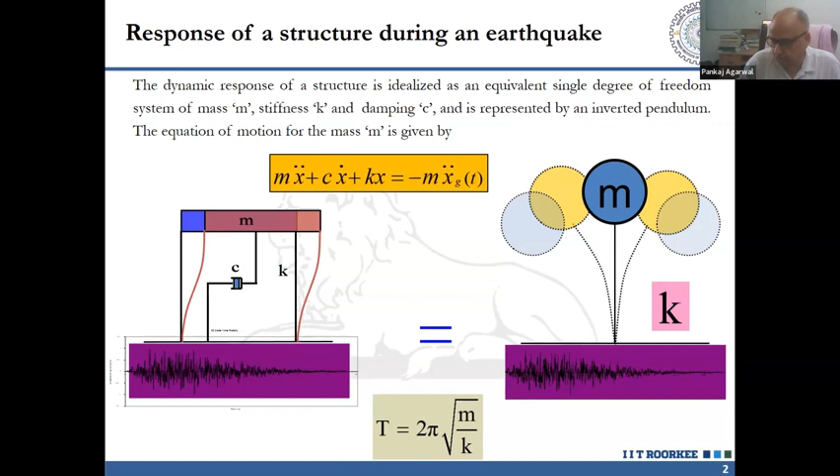So that's why any design philosophy applicable for conventional design, which you studied in your BTech program, will not work in the case of earthquakes. Since in the conventional case, the level of forces is much lesser as compared to the severe earthquake, whatever design philosophy you adopted in your UG courses will not be applicable to the seismic condition.

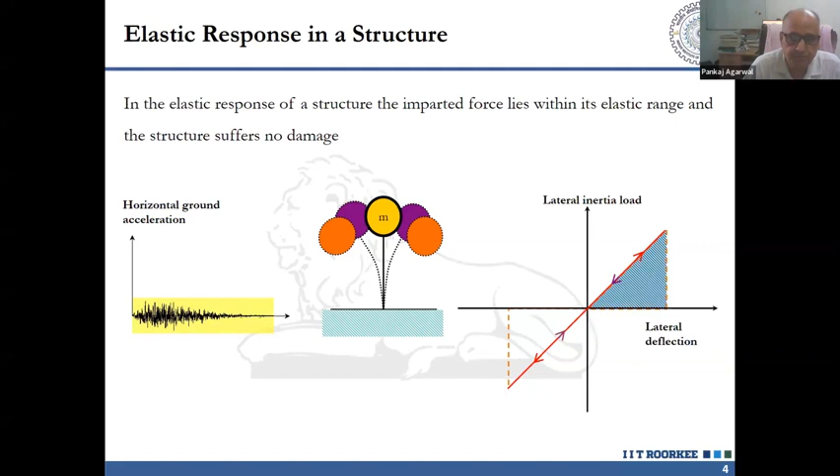So then what is the solution? The solution is that we have to basically design the structure for lower forces, so that it becomes within our permissible limit and allow some damage. That damage basically makes your structure yield and allow large deformation of the structure.

That damage, in engineering terminology, we call a plastic hinge. In a simple pendulum you can understand this phenomenon easily, since the moment is maximum at the bottom, so the plastic hinge forms where the moment is maximum, or the region susceptible to damage. That region is technically called, in earthquake engineering, the plastic hinge.

So the plastic hinge basically allows the structure to undergo large deformation. But large deformation has a definition too - the structure should not collapse. So that is the limit.

So basically there are two limits. One is where the structure starts yielding, at the level of dy, which we call yield displacement, and it deforms up to the level of du. So du is the maximum, beyond that your structure may collapse. So there is a limit between du and dy.

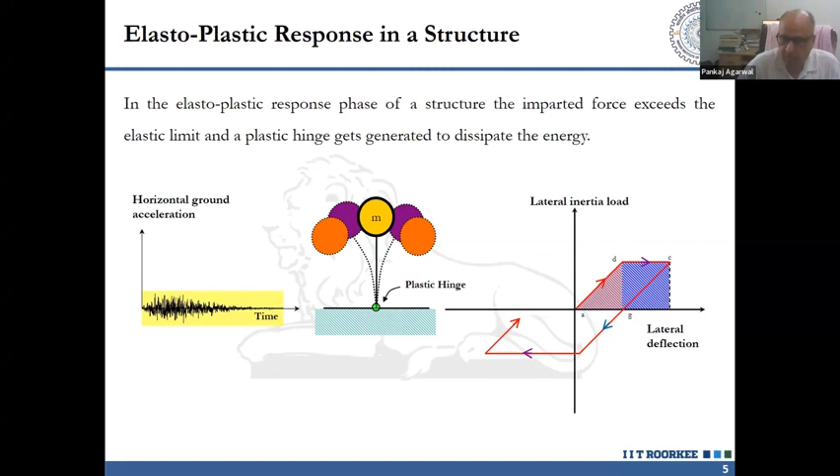And that capability of the structure is called what? It is called ductility. So the concept of ductility is basically the key approach for designing earthquake resistant structures.

So if we design the structure, we have to determine lower forces, whatever is acceptable. Once you design for the lower forces, your structure goes into the inelastic range, meaning up to a certain level of ductility. That ductility is the term mu, so delta u upon delta y we call mu.

So basically the strength and ductility are the two main attributes of earthquake resistant design of structures. Strength means the lower force, whatever is actually acting on the structure, and second is the ductility, whatever is allowed for the structure. So strength and ductility are the two main attributes we have to introduce in earthquake resistant design.

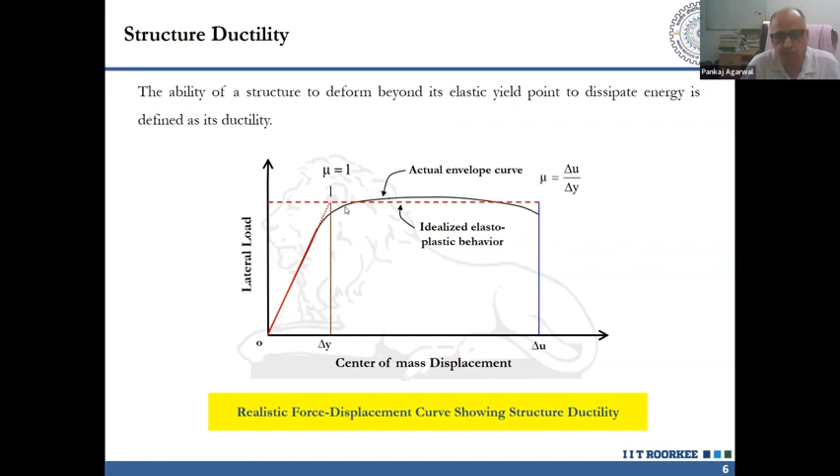So this ductility is only possible when plastic hinges form. The plastic hinges basically allow the structure to go into the inelastic range, meaning beyond the yield. That is the characteristic of the plastic hinge. So the plastic hinge should form at the region where these characteristics are fulfilled.

It should yield in flexure, and it has to gradually degrade in strength by providing confinement - flexure yielding of the reinforcement, and confinement. These are the main things that increase the capability or capacity of your plastic hinge design.

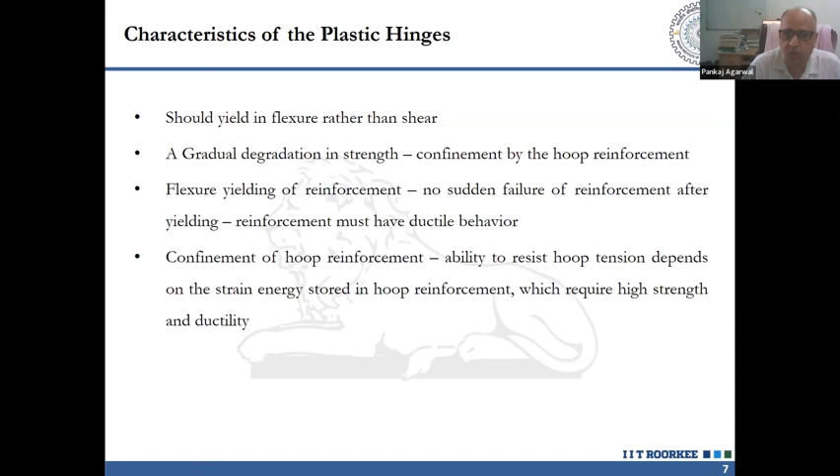So this is the phenomenon in a single degree of freedom system, and in case of multi-story buildings, the concept introduced here is the well-known concept called strong column weak beam. In case of multi-story buildings, we basically allow the plastic hinges to form in the beam rather than the column, since formation of the plastic hinge in the beam makes the structure more ductile.

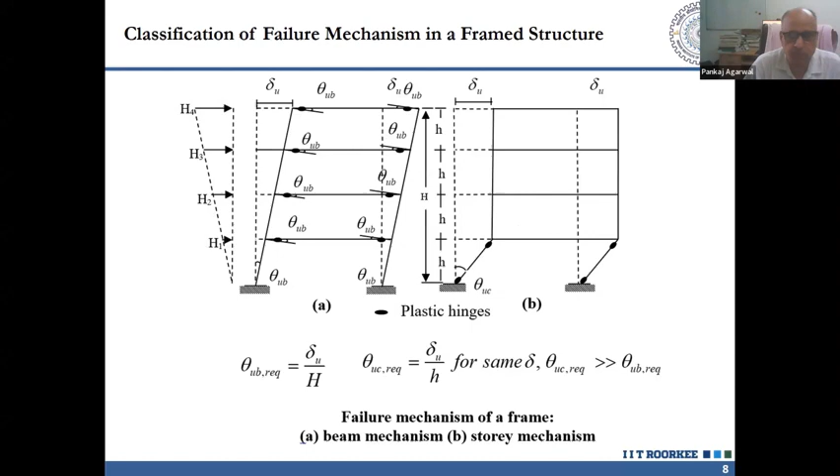Since we require more ductility, we prefer plastic hinges to form in the beam rather than in the column. If plastic hinges form at the bottom of the column, that is called a story mechanism, or a kind of rigid failure, and the deformation theta in this story mechanism is much larger than in the beam type of mechanism. That's why, by introducing the concept of strong column weak beam, we make our structure ductile. This concept requires yielding of the beam, making the column strong and the beam weak. To comply with this, our IS code 1893 and 13920 are there.

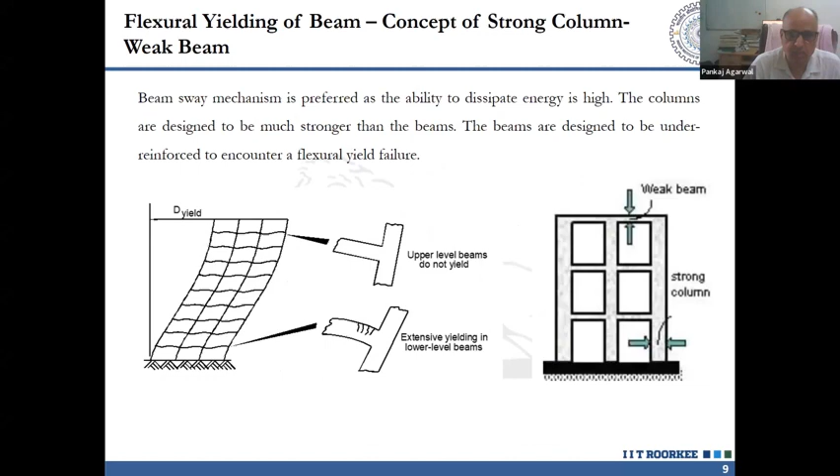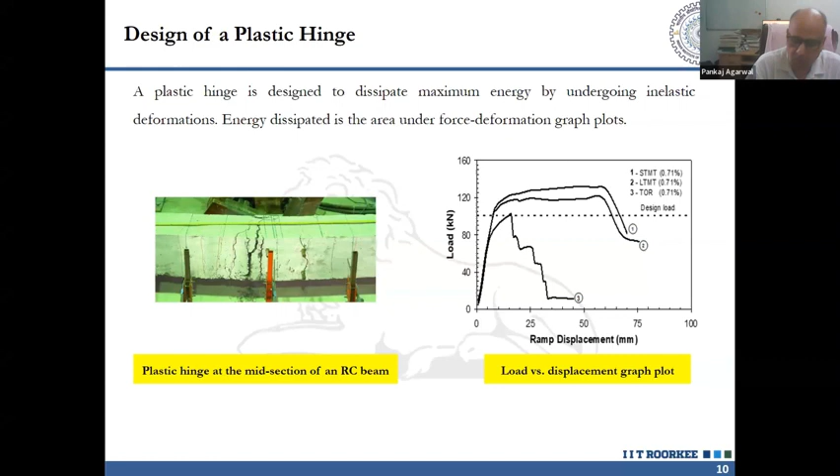This is the plastic hinge. As already shown, a plastic hinge is nothing but the damaged region where the section has yielded. We have to increase the capacity of this plastic region so that the deformation is large, which is why we provide much confinement at the plastic hinge region. The plastic hinge region is the vulnerable region of the building where energy has to be dissipated. By providing more confinement and more ductile reinforcement, you can increase the capability of the plastic hinge region. There are a number of factors responsible for increasing this capacity, and on that basis, plastic hinges are formed in the beam and column, made more ductile by introducing proper detailing of the reinforcement.

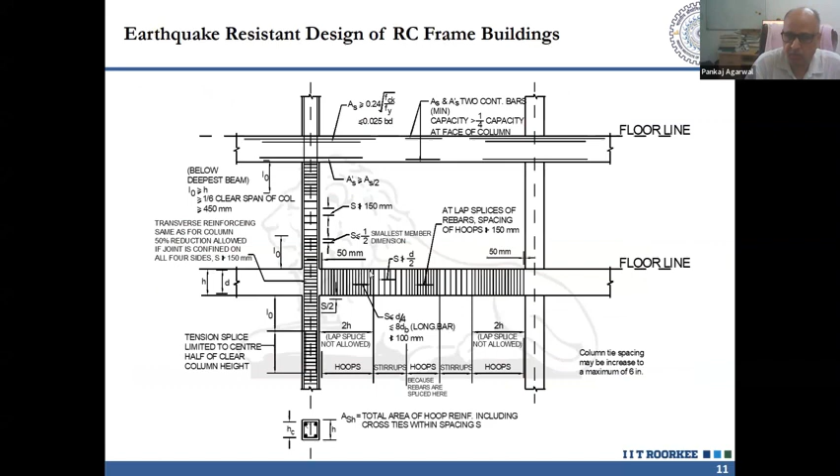This is basically code IS 13920, which is totally based on ductility design. So whatever earthquake resistant measures are provided in a building are based on the ductility concept.

Is it clear? Your sound is not coming properly, but yes sir. We are getting questions in the meantime, which we will discuss at the end, later on, after completing the presentation.

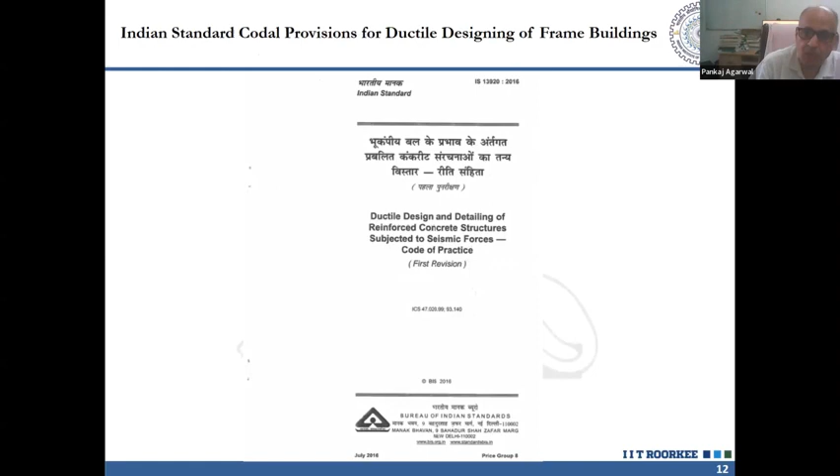Sure, this is the first part, just to introduce the concept of ductility. Now the second approach that we are working on.

That is the damping based approach. There are two properties of the structure: one is ductility, which dissipates energy by yielding, as you have already seen. The second property is damping, where the structure does not go into the inelastic range but remains in elastic condition and dissipates energy through damping.

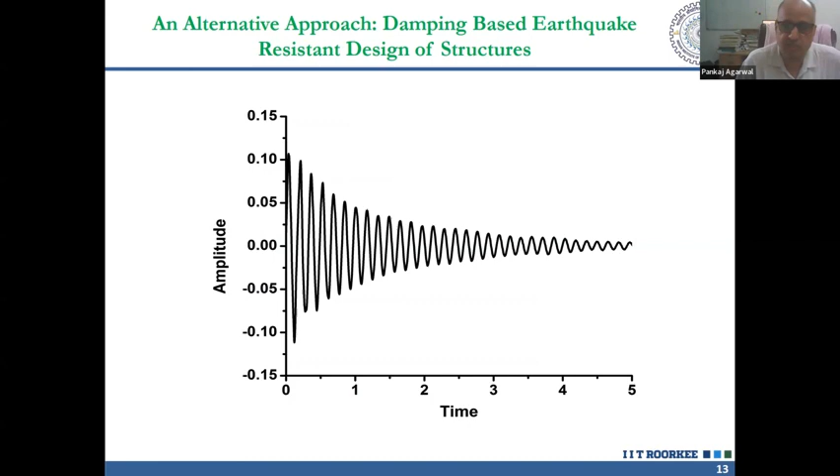First, I will show a few instances where damping plays a very big role. Since most of you are MTech or BTech students, you already know about underdamped systems, critically damped systems, and overdamped systems from your theory of vibration course or other graduate courses. So let's see how damping plays a role, using diagrams you have likely already studied.

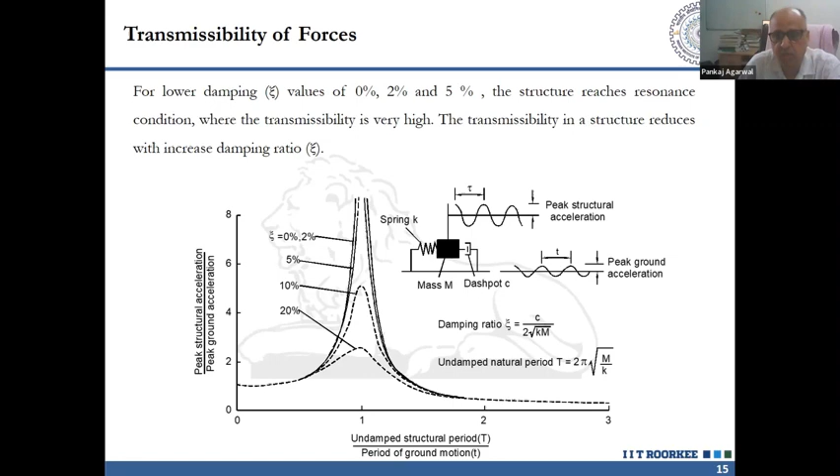As we go on increasing damping 5%, 10%, 20%, your vibration goes down, even under the condition of resonance. So that is the second instance where damping plays a very big role in reducing the vibrational amplitude or effect.

Third instance: during the earthquake, you already know the concept of response spectra. Response spectra is the response of a single degree of freedom system for a particular type of damping subjected to earthquake motion. So response spectra is basically the recorded acceleration, velocity, or displacement versus the time period of the structure, with different types of damping.

So if you plot this response spectra for 0%, 2%, 5%, 10%, 20% damping, you see that your amplitude—either acceleration, velocity, or displacement—goes down as your damping increases. So basically, whether in the case of free vibration, harmonic motion which is more severe than earthquake, or in the case of earthquake, damping plays a very important role in reducing the vibration or amplitude.

So with these three instances, it is clear that damping has a very enhanced or great power to reduce vibration. Now we have to explore how to increase the damping in the system.

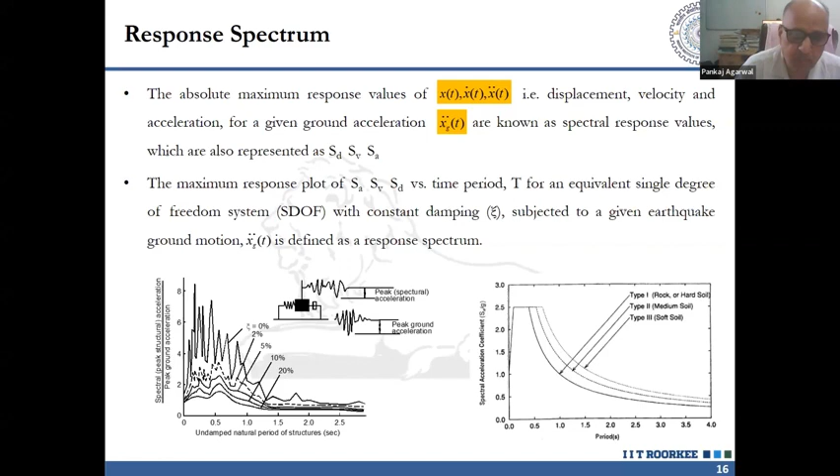We know that the range of damping is around 5% to 10%, or maximum 20%. So if the damping present in the system is in this range, it has not controlled the vibration completely. That's why we have to add some parallel devices in our structural system.

These devices are called passive energy dissipating devices, or they are also called energy dissipating devices in the literature. We have to provide supplemental damping, also called added damping, through these devices.

These passive energy dissipating devices have to be installed in our structure, in parallel, so that under earthquake conditions these devices either yield, or there are a number of mechanisms present to dissipate the energy and keep our structure remain in elastic condition. So you can understand this phenomena.

It is like an electrical fuse in your building. We provide an electrical fuse, so if the current is much higher, then that fuse basically shuts down, and the whole of your electricity line basically remains intact.

Similarly, in case of earthquake, these devices either yield, or whatever damage occurs in these types of devices, dissipates the whole energy, and your main structure basically remains in elastic condition. So these are passive devices, and they are based on different types of energy dissipation mechanisms.

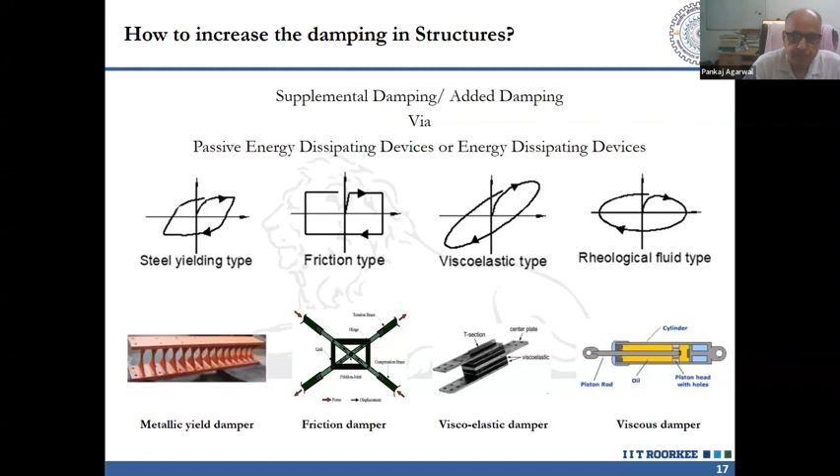To dissipate this energy, we have to make arrangements to install these devices. There are different types of arrangements possible for installing them. A general arrangement is given with a type of bracing, that is called seating belt, or seating arrangement.

We have to install either the metallic damper, the viscoelastic damper, or the fluid damper. In case of the fluid damper, we have to use another type of arrangement like bracing. But in other failure mechanisms, we can use the inverted V arrangement.

So different types of seating arrangements may be possible. It's not necessary that it has to be provided in this manner; other possible combinations may also be there. But the main thing is that one seating arrangement is required, and second, we have to connect these passive energy dissipating devices in parallel.

So once your structure basically starts deforming, that deformation goes into your devices, and the devices start yielding, and once that starts yielding, the energy dissipation starts. So all of the damage basically gets concentrated in these passive energy dissipating devices, and your main structure basically becomes elastic.

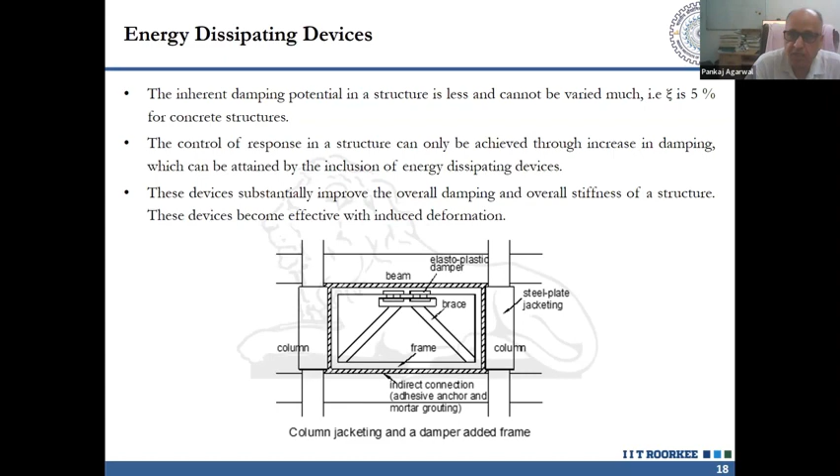This slide is just to give a comparison of different types of passive energy dissipating devices. The basic construction is the viscous fluid, which is like a shaft, similar to a shock absorber in your automobile.

Viscoelastic dampers are again basically a type of damper, and metallic dampers are basically your ADAS type of damper. ADAS means added damping and added stiffness, to increase the stiffness as well as increase the damping in the system.

And the friction damper, you already know it. Generally we use Coulomb friction, that is mu into n, where mu is the coefficient of friction and n is the normal force acting on the surface. With the help of that friction, we dissipate the energy, so that is its hysteresis behavior.

Hysteresis behavior is basically the load-deformation behavior. The load-deformation behavior of the viscous damper is horizontal elliptical type, and for viscoelastic it is elliptical or inclined elliptical, since it has some stiffness. However, the energy dissipation in the viscous and viscoelastic dampers are more or less the same.

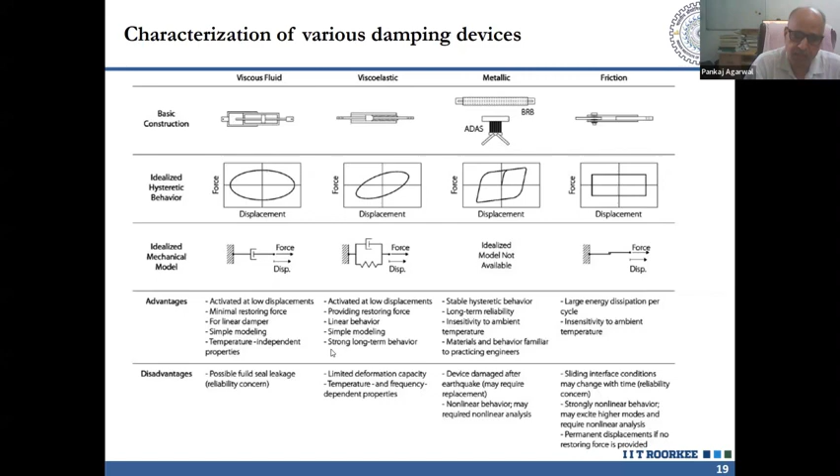And if it's in between, then viscoelastic. Friction is again a choice depending on the situation. There are a number of advantages in case of the viscous fluid damper - activated at low displacement, minimal restoring force, linear damper. You can read it.

So this is the concept of damping-based vibration control mechanism. Is it clear? Yes sir. Okay, so I think the two concepts are clear.

One is ductility based and second is damping based. So how do we produce ductility? The ductility has to be produced in the system through plastic hinges. In the plastic hinges, you have to make your region more and more stable so that you can deform your structure in a ductile manner. So the plastic hinge is the key word for making your structure resistant based on conventional design.

And in case of damping based, you have to use either passive energy dissipating devices, and it will be basically installed parallel to your structure by some seating arrangement. So the main limitation of passive energy dissipating devices is that we require additional space, or you can say that it has to entrap your open space.

But architecturally, if you have to be just planning it, then it can be easily accommodated.

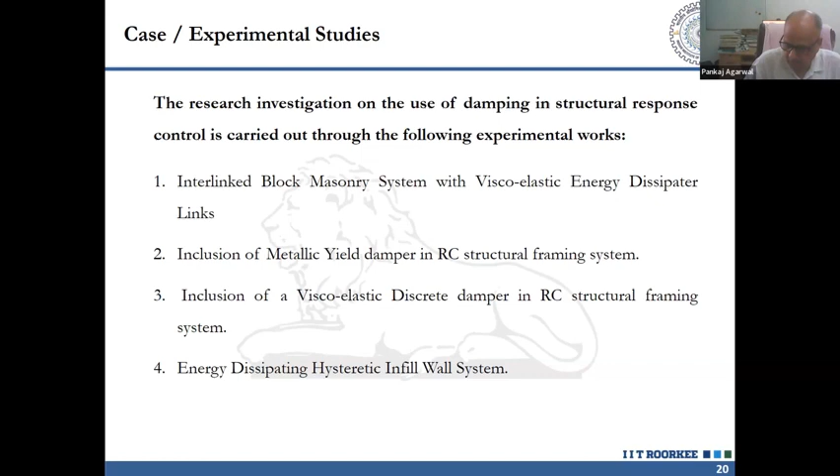So I will take 4 case studies. One is the interlinked block masonry - this first case study is basically about how we make our load bearing type of structure earthquake resistant. The second and third case studies are concentrated on RC frame type of structure. And the fourth one is how we make our non-structural element, particularly the infill wall, into an energy dissipating element. That's why I have considered these 4 cases here.

The first is interlinked block masonry, which is load bearing. As you know, my topic for this talk is basically earthquake resistant construction in India. In India, there are basically 2 types of structures - one is the load bearing type, and second is the multi-story frame type of construction.

About 90 to 95% of constructions are basically masonry type, particularly in rural areas, and around 7 to 10% is only frame construction. But the situation is changing - frame or multi-story building construction is going up, and load bearing type structure is going down. But still, the large building stock is concentrated on masonry type buildings, and only 10 to 12% is RCC type structure.

So the main thing is how we make our load bearing structure earthquake resistant by using the damping technique. I will not discuss how conventional masonry buildings are made earthquake resistant by providing different types of bands - lintel band, roof band, gable band, plinth band. That technique is given in IS code 13935 or other codes.

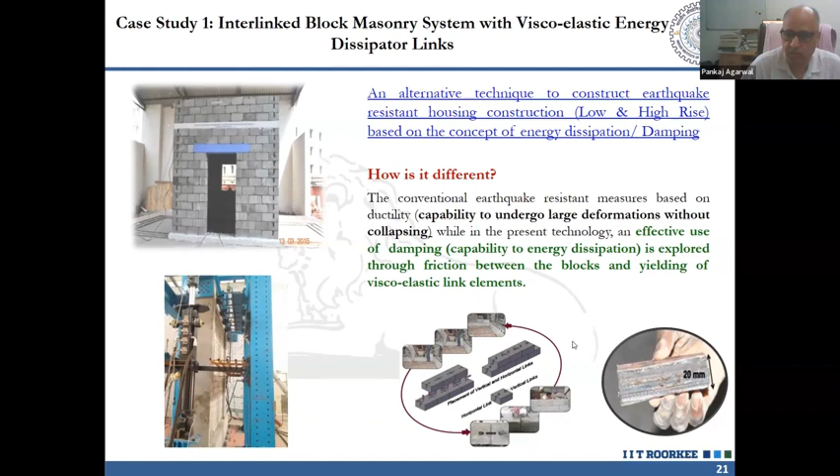So this is the complete concept of providing the slotted blocks. In the slotted block, we have to insert two links basically on the upper face, two links on the bottom face, and one link on the side face.

During the earthquake, if you see the movement of the block, two types of motion are possible: either translation or rotation. In case of translation type motion, the deformation basically passes through the yielding viscoelastic link element, and it starts dissipating the energy.

If the block tries to rotate, then the horizontal link comes into the picture and starts yielding, dissipating the energy. So basically the friction is between the block and the yielding of the link, two sources of energy dissipation mechanism that we provide or utilize in this structure.

There is no mortar used to construct the whole building or whole model. So friction as well as yielding, two types of energy dissipating mechanisms, are used just to dissipate whatever incident energy is provided by the earthquake.

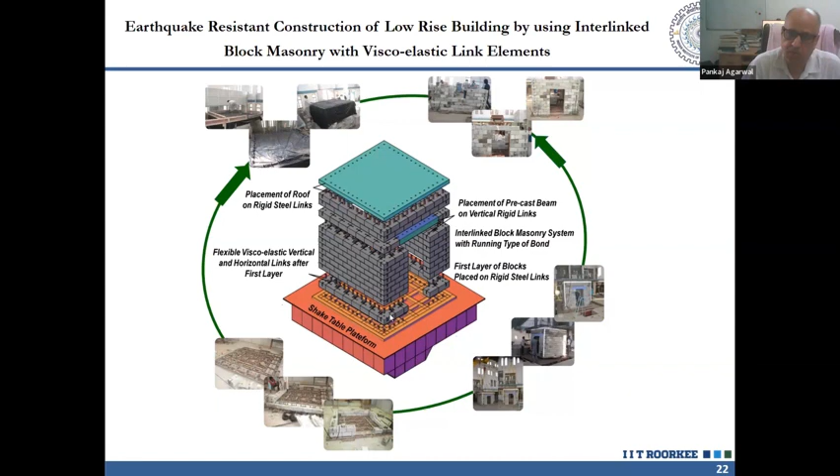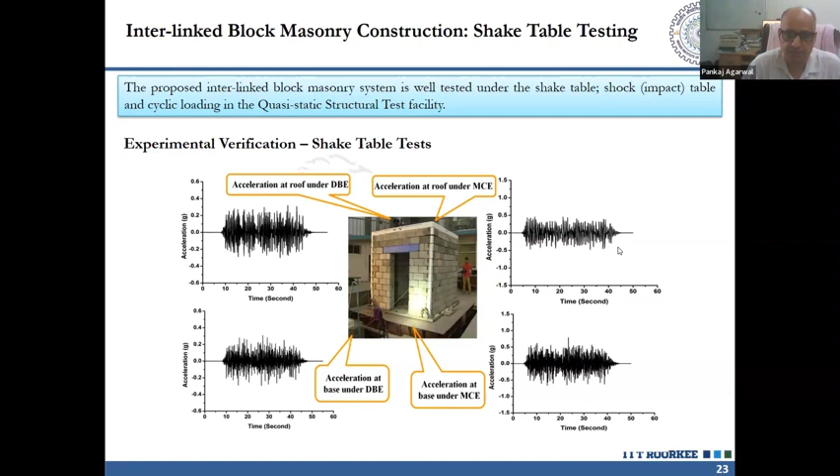This is the actual photograph of the model resting on the shake table. This is our shake table facility, and we applied that motion. This is the base motion, recorded at two levels, and under severe shaking, the model retains its shape, energy is dissipated, no damage occurs. The friction and yielding basically play a big role in dissipation, and the vibration imparted in the structure has been reduced. This is basically under the shake table.

The second test conducted on this model was on the shock table. The shock table type of motion is again a very severe type of motion. Basically, the shock table motion is similar to the situation you have heard of in car manufacturing, automobile manufacturing, which is called the crash test of the vehicle.

So it is similar to that type of test. We have to apply a very severe shock to the model under impact type loading. It is not an earthquake kind of loading, and we see how the energy has to be dissipated. So the shock table is a very severe type of shocking, like a crash test in the automobile industry. If the structure passes this type of test, it can easily withstand the earthquake comfortably.

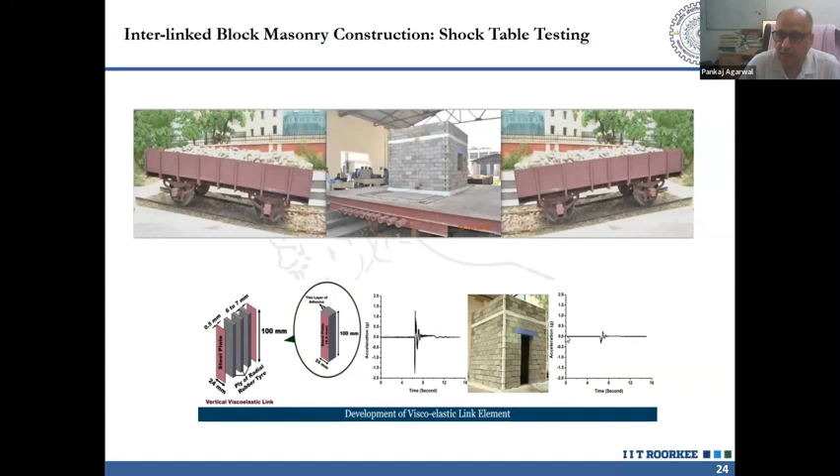So these are the viscoelastic link elements of the model, and it is symbolic. We have to apply this type of motion, and at the roof level it becomes like that. So you can see how the motion has reduced. That is basically the power of the damping mechanism installed in this feature.

So that model we have to test under different shocks. The first shock is a severe type of shock, the second shock is more severe than the first, and the third shock is more severe than the second. You can see the result of that.

Two force balance accelerometers are installed at the ground platform level and at the roof level. We apply the motion and record it—this is the imparted motion to the structure, and this is basically the output. So the whole of the energy has dissipated and the motion recorded is reduced to this much.

You can see how the vibration is controlled or how the whole of the energy has dissipated. Again we increase the severity, and again it is reduced. We increase the severity again—that is the maximum shock. This is basically the result, showing the effectiveness of the damping mechanism present in the system to reduce vibration.

If you test the conventional type of model—I am not showing the test result of the conventional model here—it will amplify the motion. Amplify the motion means if you record the motion at the roof level, it is much higher than whatever is imparted at the base of the structure. So instead of amplifying, our system has to considerably or significantly reduce the vibration.

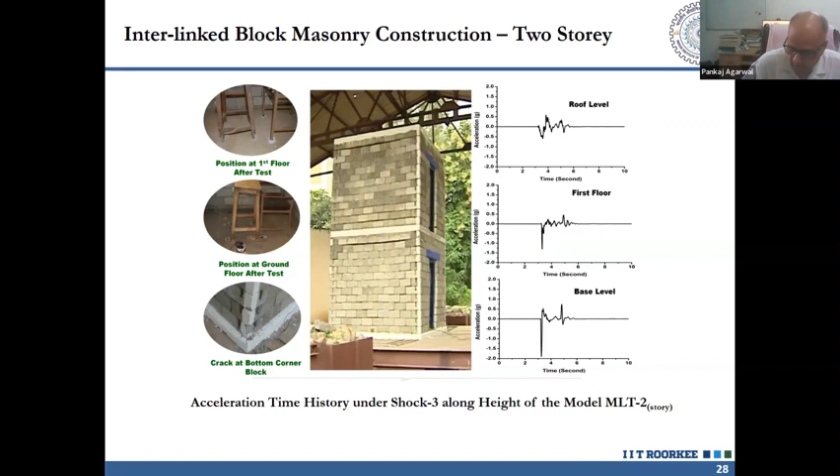There are a number of advantages of this type of technology. It is environmentally friendly, and you only have to make the block as well as require the link element. It is low cost, and it can be made anywhere. The cost is much lower compared to brick, and it is easy to handle. You only require two things, and within one or two days you can make the complete model. Nothing else is required, and it is a clean and green technology, semi-prefab or precast type, with less water consumption.

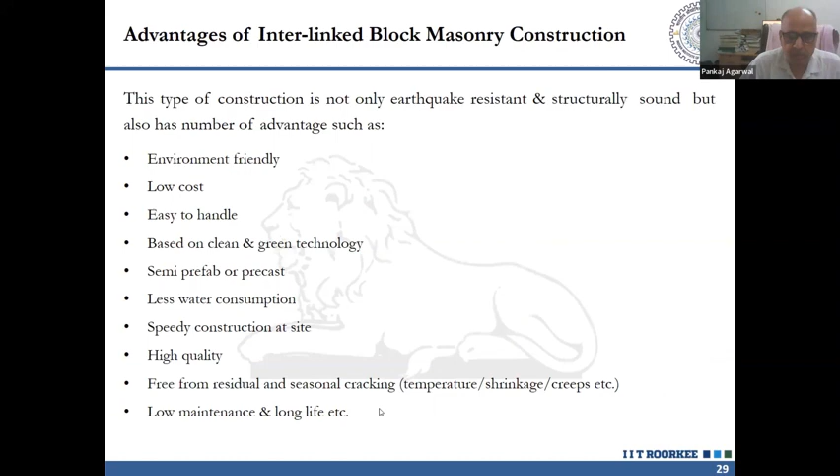Only your foundation system and roofing system remain the same, and the rest you can make very fast, speeding up construction at the site. It gives high quality, free from residual and seasonal cracking, since we are not putting any mortar. We only have to put wrapping, basically just to fill the outer surface. It has low maintenance, so there are a number of advantages.

So this is the first method of how to make your load bearing structure basically earthquake resistant.

The second case study is based on the metallic damper. Here we make the ADAS type of metallic damper. My PhD student Naveen has worked on this many times, and other students are also working on it, on different configurations of the metallic damper. Since the configuration plays a very big role in the dissipation of energy, different types of combinations may be possible.

Here we are making the ADAS type of damper, with two flexor plates and one shear plate. This is basically how it yields and creates deformation. As deformation is applied in this metallic damper, it starts yielding and dissipating energy.

First of all, we tested this metallic damper in our lab facility. This is the conventional ADAS damper. It is a combination of a shear plate and a flexor plate.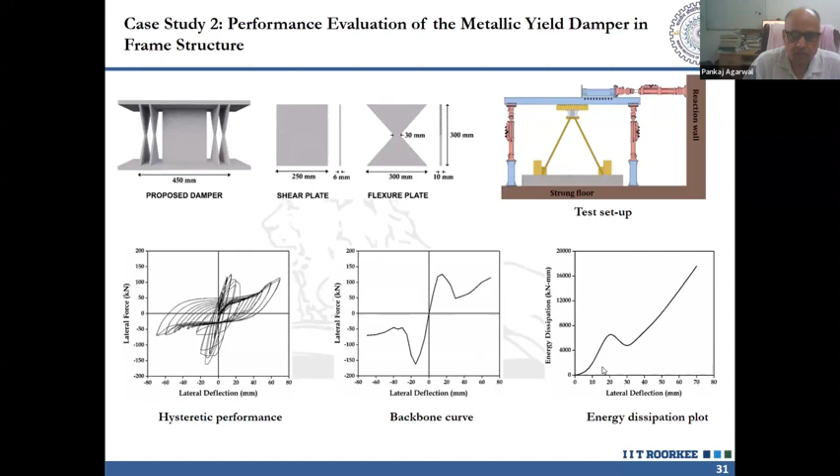After that, we made a full scale type of structure. We have another facility called the large scale pseudodynamic test structure facility, in which we can test full scale one-story, two-story, or three-story full models. These types of models we tested in the lab.

This model is basically a building on a hill slope, and we will test it. But earlier we tested it on our testing platform, where we put the model and test it under vertical as well as horizontal actuators. These actuators are similar to our shake table type test facility, but here we apply the load at concentrated places, testing the model under lateral load with the help of two vertical actuators.

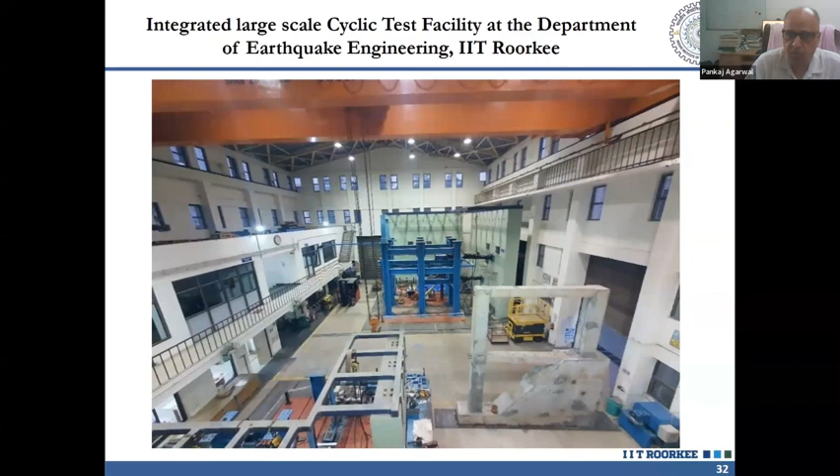We apply whatever vertical load is coming on the structure, and then we gradually increase the horizontal loading. The complete load deformation diagram obtained is used for calibration of your mathematical modeling, or to determine other parameters.

So first we tested a simple bare frame under this combination of three actuators: one horizontal actuator and two vertical actuators. The role of the vertical actuators is to apply the vertical load. We keep the vertical load constant during testing and only increase the horizontal load, obtaining the complete load deformation diagram.

This load deformation diagram is similar to testing material in the lab, concrete or steel, where you obtain a load deformation diagram or stress strain diagram. In a similar fashion, we tested the full scale structure in the lab, and obtained the complete load deformation diagram.

That load deformation diagram, or hysteresis, gave us the frame behavior. Since it has both an elastic part and an inelastic part, it is very useful for calibration of your mathematical model or calibration of other features. So we calibrated our analytical model, either constructed in OpenSees or any other finite element package, or even conventional packages like SAP and other software.

We have to calibrate this, and then we apply it to a multi-story building. The calibration and verification are the two key features for the purpose of testing this model. Then we basically apply the metallic type damper here, install the metallic damper, and we obtain the complete hysteresis behavior. You can see how the hysteresis behavior changes with the combination of your frame with the metallic damper, and you can easily see the difference between the two structures' load deformation diagrams.

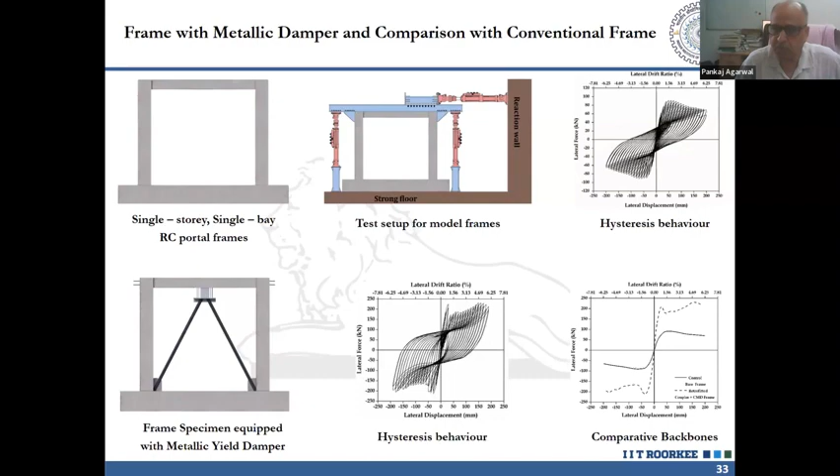All the details are given in the published paper. The paper has been published in our ACI journal and other journals, and we can share the paper if you are interested in more results.

Similarly, we have made a third type of device, basically a passive energy dissipating device. I think time is okay. Just cover it. No, sir, we can continue. We have... okay, yes, please go ahead.

So this is the third case study, the viscoelastic damper. It is similar to what we tested in the load bearing structure. This type of link element, we prepared with the help of this viscoelastic link element, and this link element we prepared from the radial rubber tire, specifically the ply part of the radial rubber tire. This type of rubber is very useful for making this type of link, since it has rubber and steel wire. With the help of the radial rubber tire, we made this link element. Radial rubber tire is a copolymer of butadiene rubber, and it is a very good viscoelastic material.

So we made this slotted type of arrangement here. In the case of the concrete block, we made it in a similar fashion, a slotted arrangement with steel arrangement there. In this slotted element, we install or insert this viscoelastic link element. The main key feature of this viscoelastic damper is that we basically make two steel plates form two steel bearings here, bearings just to resist your vertical load. So the vertical load is transferred easily by this damper, as well as, in certain conditions, this link will yield and dissipate energy.

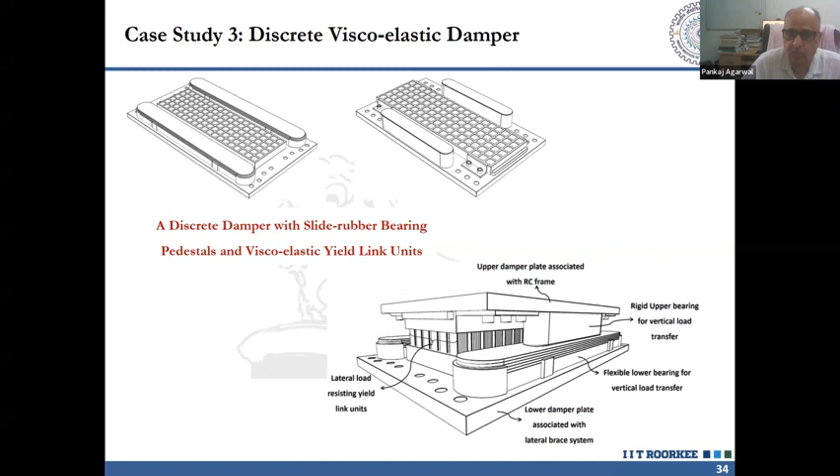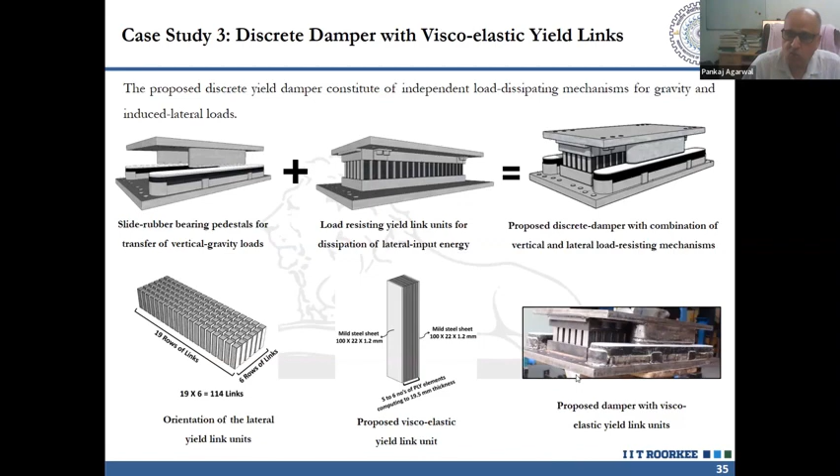That damper is basically our patented device, and we have taken the patent for it, or it's under process. So this is the complete photograph. This is the sliding type, slide rubber bearing type, just to transfer the vertical load, and for dissipation of energy, this link element in combination with it forms the complete viscoelastic damper. This is basically the actual damper which was made in the lab.

That damper is again tested similarly to the metallic type of damper in our lab facility. This is the test setup, the same setup already shown, and its behavior is different than the metallic type of damper, but it has a number of advantages compared to the metallic damper. With the metallic damper, there is no provision to transfer the vertical load once the element has yielded. But in the case of the viscoelastic element, this damper has two arrangements, one for transferring the vertical load as well as the horizontal load.

This is the capability of the energy dissipation link element. As we increase the number of link elements, our capacity to dissipate energy increases more and more. So it is basically starting from 6 links, 18 links, 36 links, 72 links, or even 114 links.

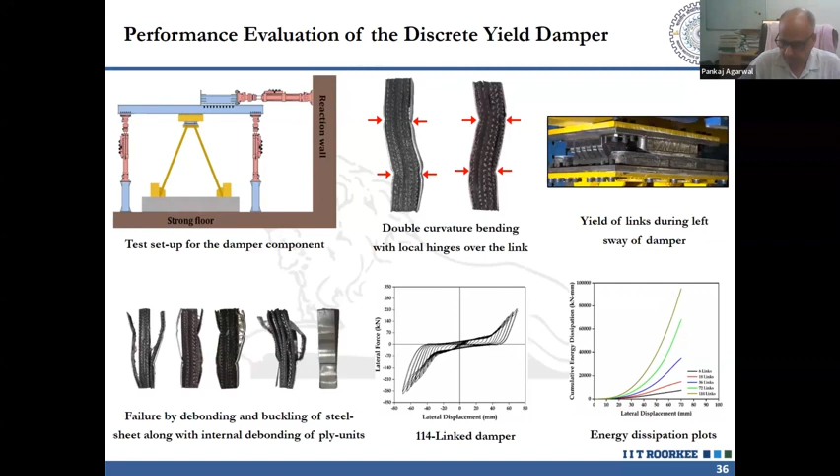Again, the performance of your structure increases with the load deformation diagram. Its capacity has to be increased 2 to 2.5 times than the original structure. So this result gives proof that this viscoelastic damper has increased your capacity.

This is the energy dissipation capacity of your damper. So you can see at a low drift of 2%, the damper fit model has dissipated much more energy as compared to your conventional type. This is after testing it, where your link has yielded and dissipated energy. After the earthquake passes, this link has to be replaced.

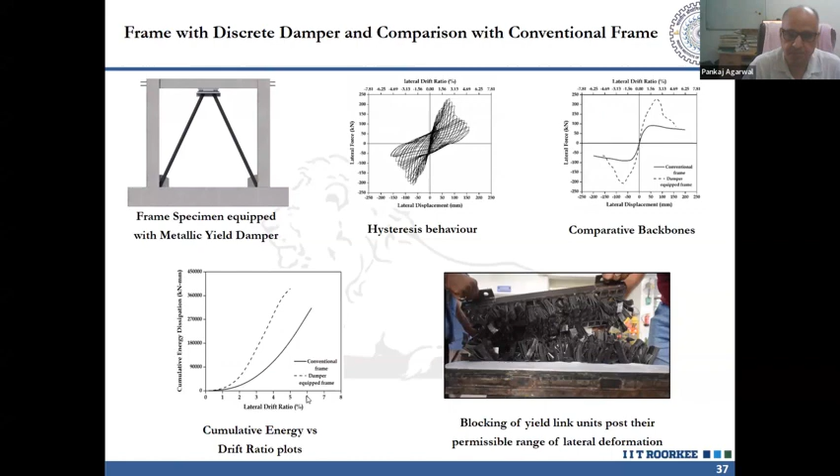Clear? Yes, sir. Okay. Yes, sir.

So this is another advantage - the distinctive load transfer mechanism, as I already told you. There are two types of mechanisms to transfer the vertical load as well as horizontal load, with vertical load installation and restoration of a rotated yield link element.

Here we are using this type of visco link element, but it is a very versatile type of damper. You can use another type of link element material. There are a number of materials available in the market, like shape memory alloy or other types of material. So you can make this link with such material, test it in the lab, and compare the results with other types of material as well.

This is the fourth case study. How is it made? In a multi-story building frame, there are basically two main elements: the structural component and the non-structural component. Under the non-structural component, the masonry infill plays a very big role. So how do we address this as well?

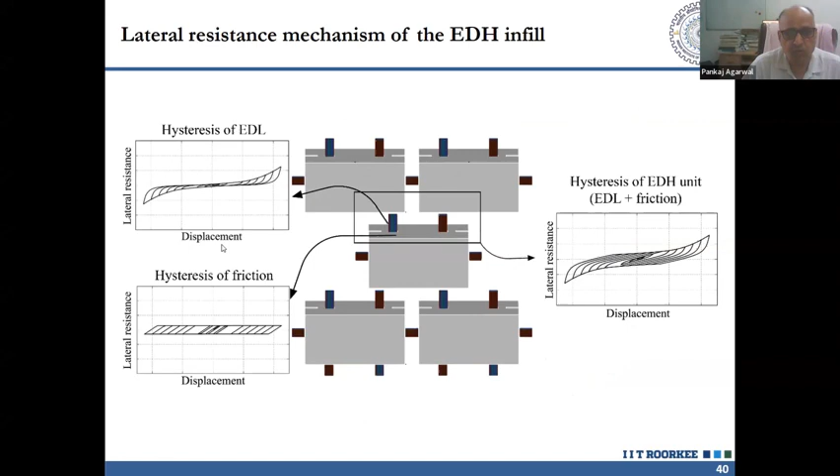As I already told you, we have used two energy dissipating mechanisms - one is friction and the other is yielding. With the help of these two mechanisms, we dissipate the energy. Now by converting this infill wall to be energy dissipating, there are a number of advantages.

Since this infill wall will not be damaged during the earthquake, it dissipates the energy very well. So it will basically protect your main structure system, acting as a secondary load resisting system for your main structural system. And second, it dissipates the energy.

The third main advantage - whatever failure occurs in conventional masonry, either in-plane failure or out-of-plane failure, is not possible in the case of energy dissipating infill, since the out-of-plane capability of this infill wall has increased a number of times as compared to the conventional type.

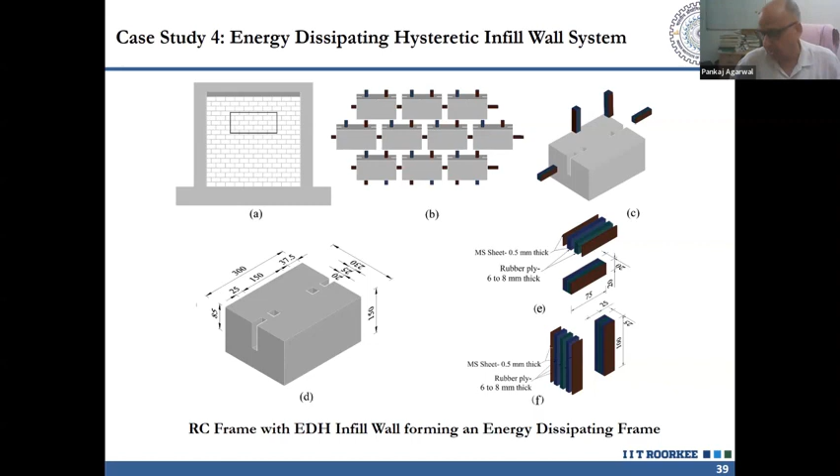We have published a number of papers in Earthquake Spectra and Engineering Structures and other journals. You can refer to these papers to see how that infill wall will be beneficial for construction.

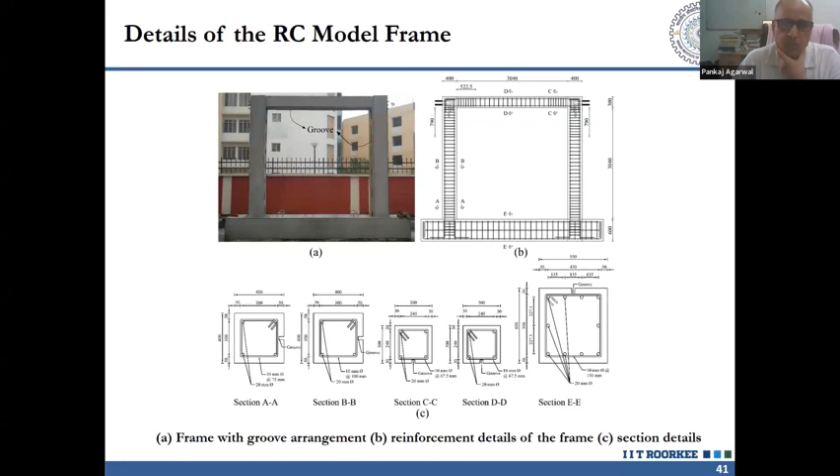So we have tested this a number of times. One of my students, Nidhin, has done this work, completing a full PhD thesis on it. Shortly it will be available on your platform Shodhganga.

So this is your frame, and we have to be tested. So we just need to install this type of infill wall.

We have to make some arrangement, like a groove in the shuttering, and we have to make a hook with this groove. With the help of this groove, we connect this infill wall with the main structural system so that it is connected throughout the structural system. That's why the out-of-plane capacity of this infill wall is increased many times as compared to the conventional infill wall.

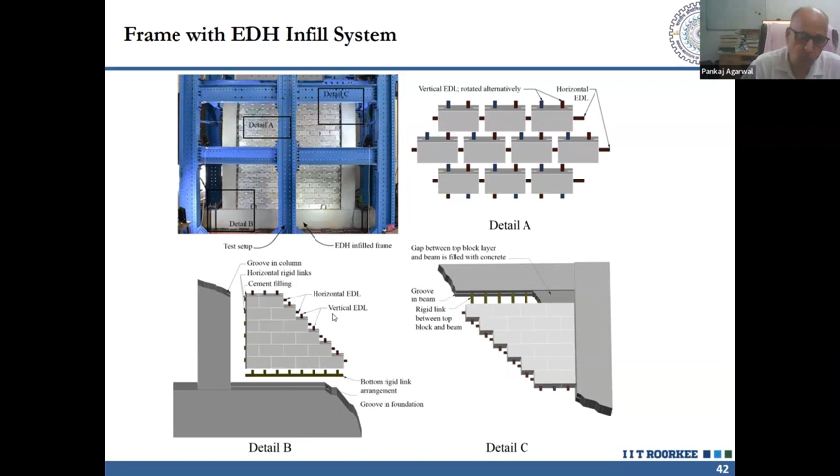In conventional infill wall, we only rely on friction connection. But in this case, we basically insert a rigid link, and with the help of this rigid link, we connect this energy dissipating infill wall, that is called EDH infill wall.

And again, we have tested this in our lab. The test setup we already showed, and the complete lab setup we made. We tested three different types of frames: one is the bare frame, then the conventional brick infill wall, and then the energy dissipating infill wall.

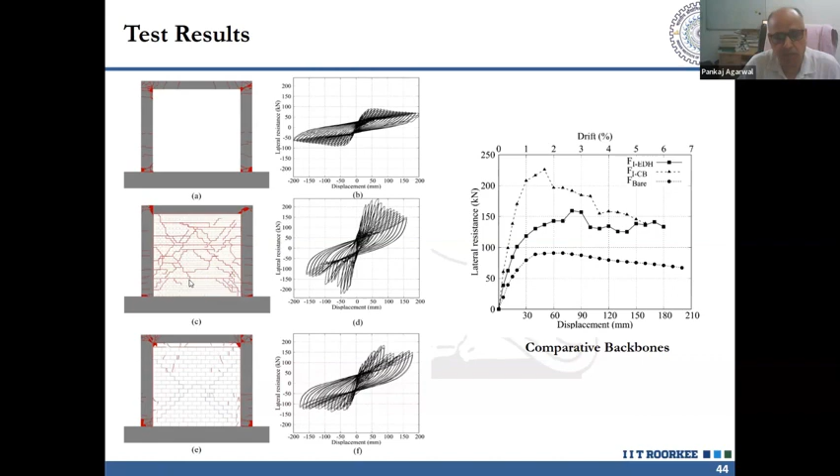The second thing is that in case of the conventional infill wall, the whole wall gets damaged to dissipate energy. While in the EDH infill wall, the infill wall remains intact, only some minor disturbances occur while dissipating energy. So it remains intact and will also act as a vertical load resisting system, or a parallel system with that. However, in case of the conventional wall, it is completely damaged while resisting forces.

This is the comparison of that. I will not go into much more detail about it since the time is already over.

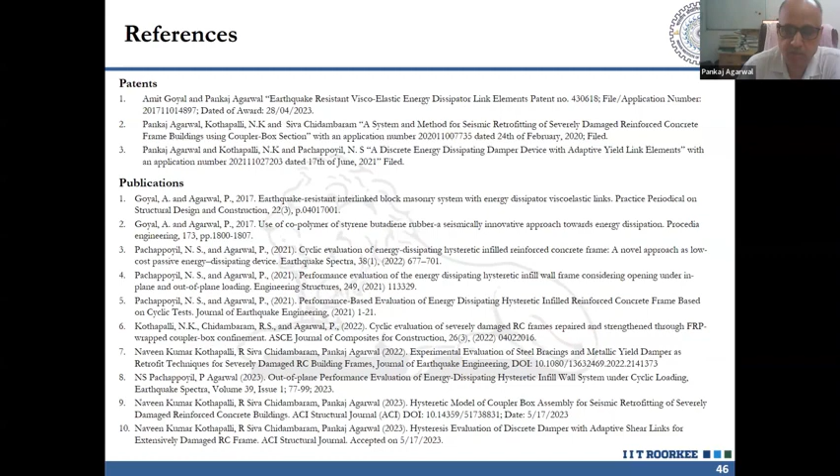And these are a number of publications on viscoelastic and passive energy dissipating devices. We are working on this, and a number of PhD and MTech students are still working to explore new types of damping devices to dissipate earthquake energy.

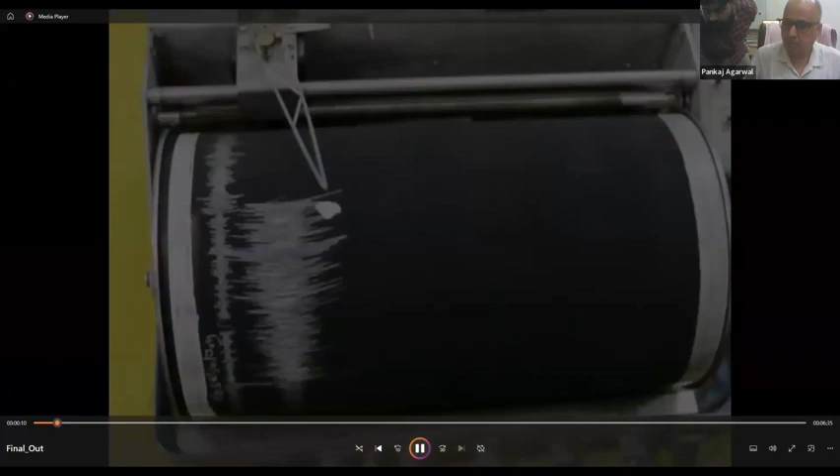Sound is clear? Yes, sir. Yes, that cannot be stopped. Now, thousands of people lose their lives during earthquakes due to collapse of man-made constructions.

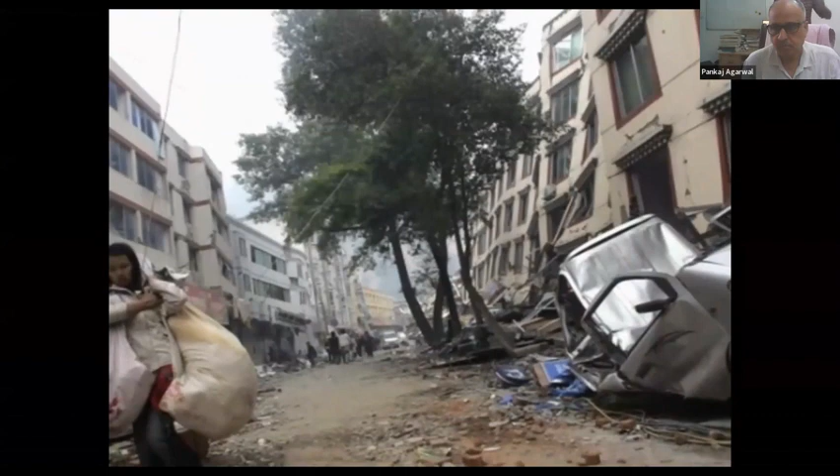Each earthquake brings many challenges for researchers. In developing countries, masonry is one of the most affordable and adaptable building materials. In India itself, which is the second largest developing country, most of the population lives in masonry structures.

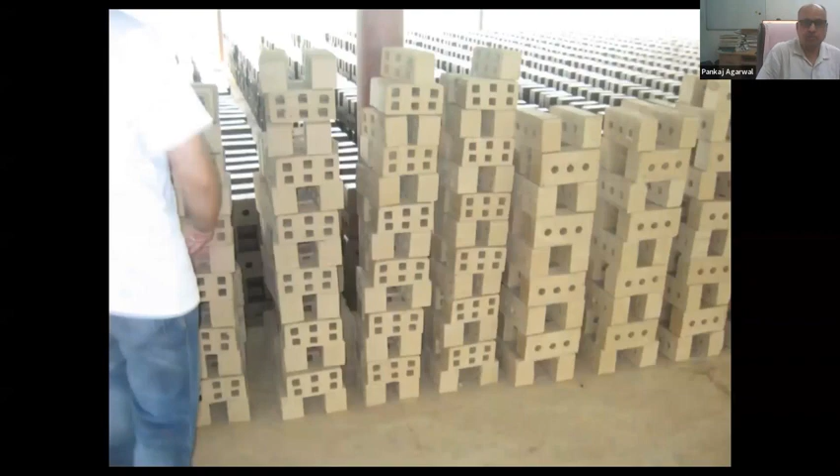Your audio is muted, sir. Sir, your audio is muted. Can you please unmute that? Masonry construction. Yes. Yes, fine.

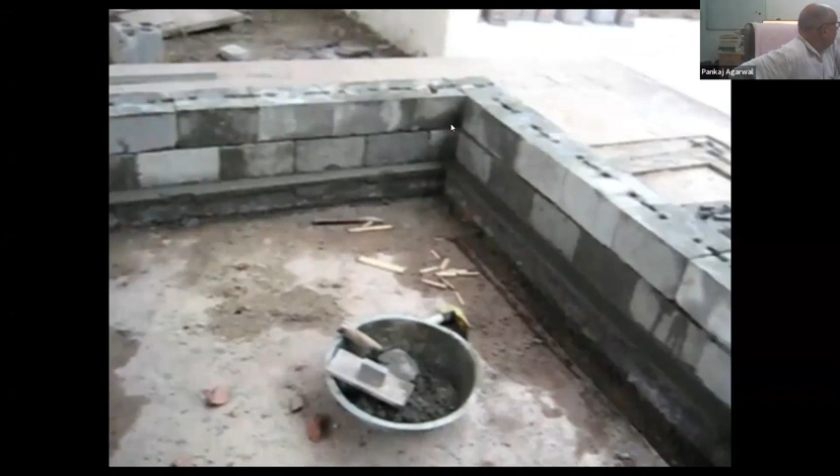Worldwide, many researchers churn their minds for improving the performance of masonry structures, especially during earthquakes. The Department of Earthquake Engineering at IIT Roorkee has developed a new, affordable, interlinked block masonry technique in the construction of earthquake-resistant buildings. The technology works on the principle of energy dissipation through damping and is successful in severe seismic zone 5 as per IS 1893 Part 1, 2002.

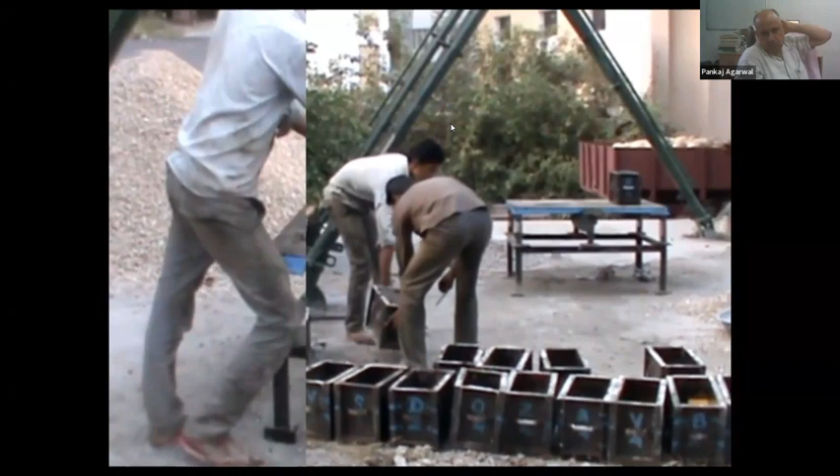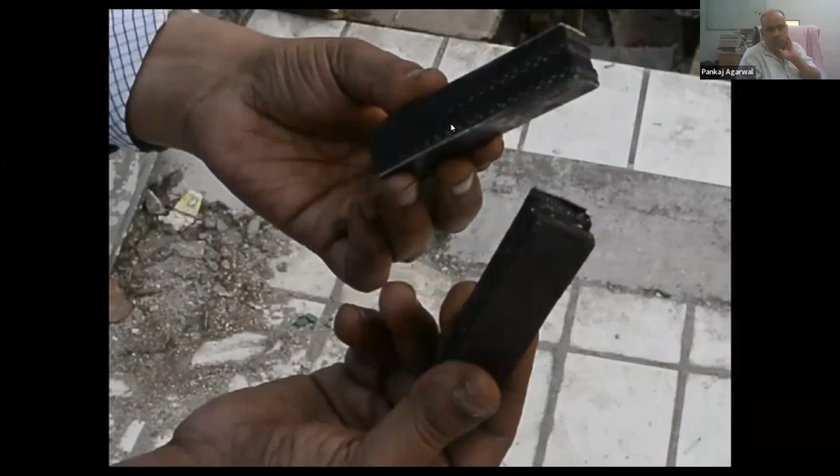The proposed research revolves around the development of well-designed slotted concrete blocks and viscoelastic energy dissipator links made up of used radial rubber tires, encapsulated between very thin steel plates. These old and used rubber tires are used as viscoelastic material because radial tires are made up of a copolymer of styrene butadiene rubber, which is a viscoelastic material.

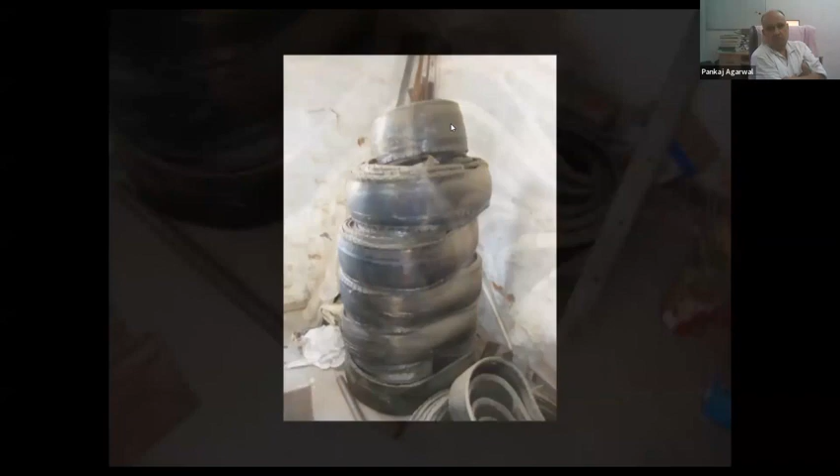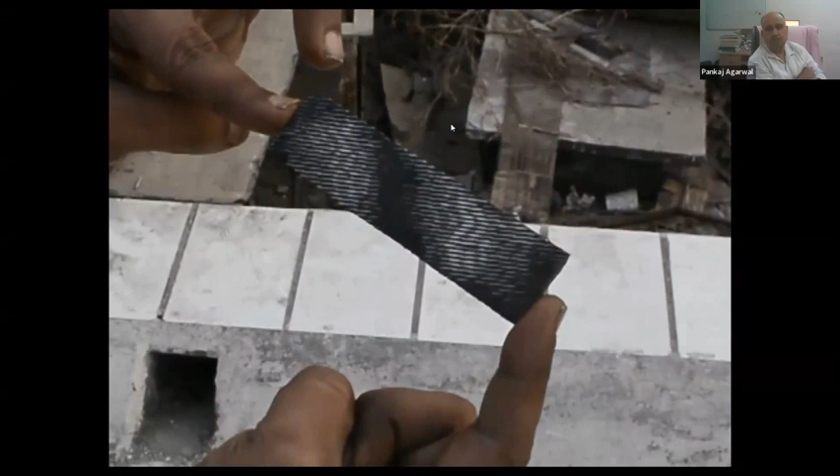The ply, that is the base part of the radial tire used for making viscoelastic energy dissipator links, has a maximum part of steel wires embedded diagonally in the rubber, which enhances stability, strength, and viscoelastic property of the material. It is available at a very cheap cost in the kabadi market, and cannot be recycled easily.

Properties such as high strength, high tear resistance, high shear resistance, and high toughness are more effective for the development of viscoelastic energy dissipator links.

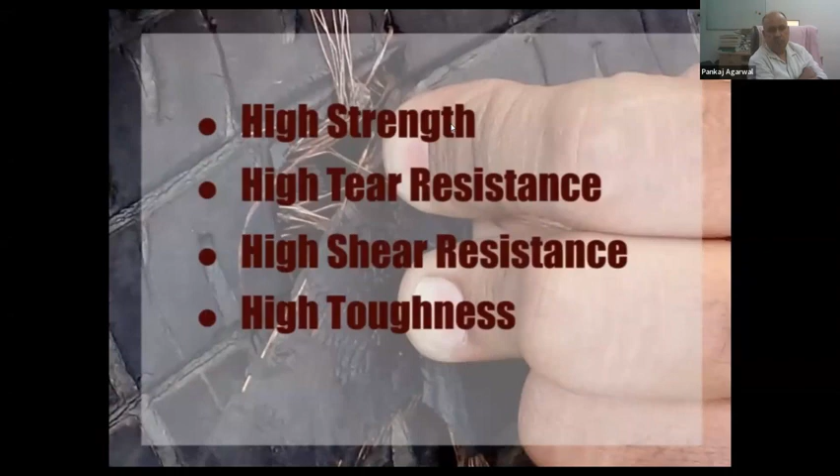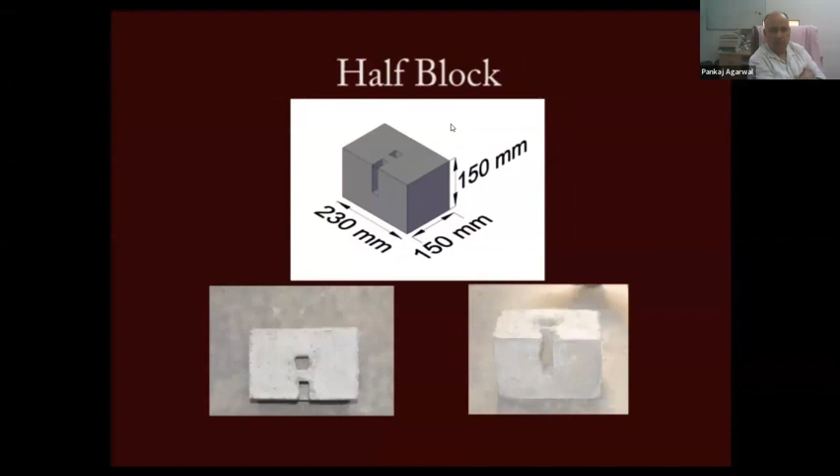3 types of interlinked concrete blocks, that is stretcher block, corner block, and half block, are developed to make possible arrangements of L, T, and cross in the masonry construction. Interlinking of the blocks is done with the help of 2 types of viscoelastic links, one vertical and one horizontal.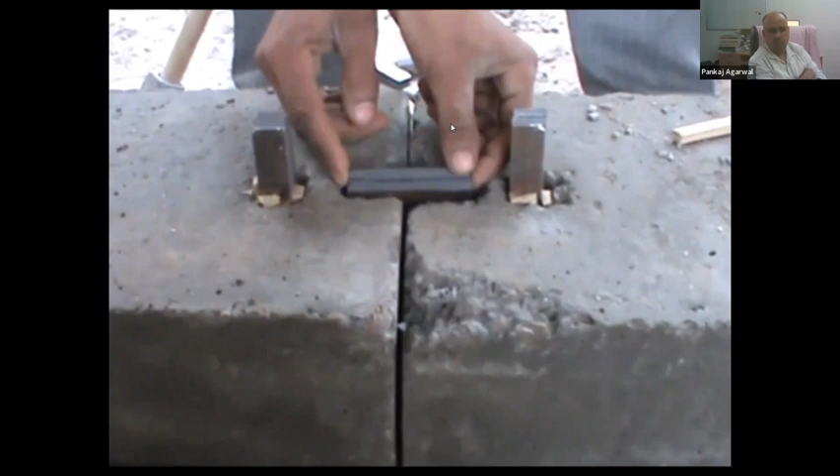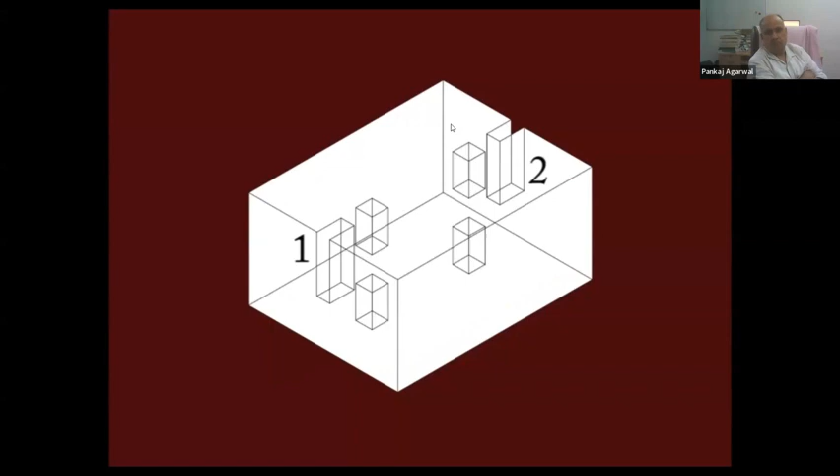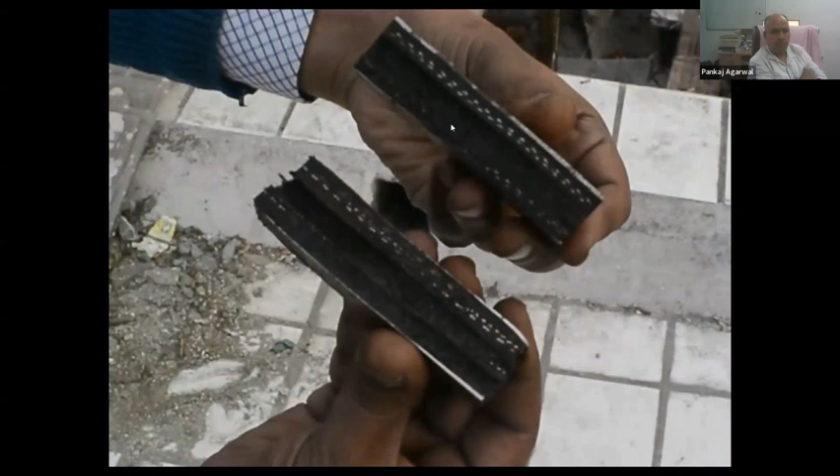No cement is used for the interlocking. Rather, the concrete blocks are provided with 4 vertical grooves to restrict translation and 2 horizontal grooves to restrict rotation under severe earthquake loading. The strength of concrete blocks is kept much higher than viscoelastic links for energy dissipation through the yielding of low-strength viscoelastic links and friction between the concrete blocks.

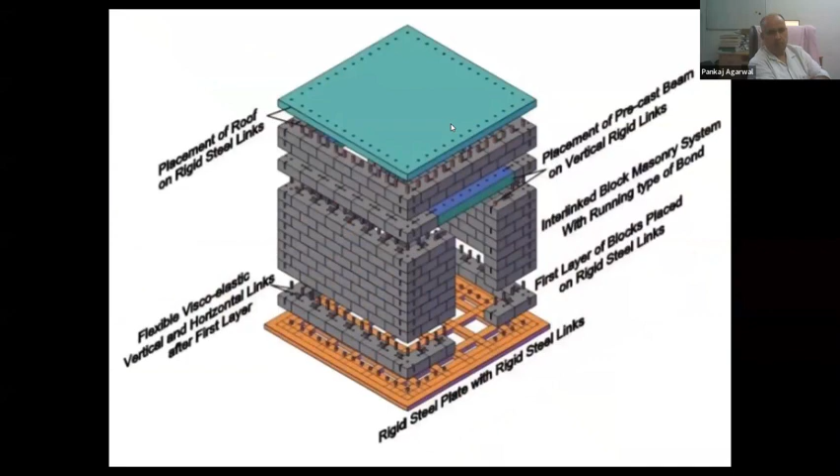The developed technology is tested under severe conditions on shake table and shock table test facility by simulating artificial earthquake excitations. Its seismic performance is analyzed experimentally. A full-scale housing model with maximum load-carrying capacity is made on the shake table and tested under series of simulated earthquake motions as per IS code 1893, part 1, 2002.

Peak ground acceleration of 0.18g and 0.36g, that is DBE and MCE of zone 5, considering soft soil condition, is applied.

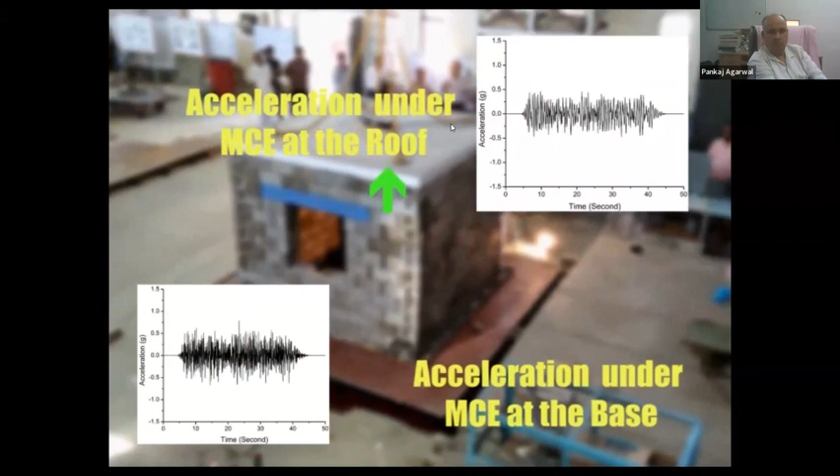Along the height of the model, there is a reduction in maximum roof acceleration as compared to base motion without any damage in the model. The energy imparted is completely dissipated through friction and viscous damping of viscoelastic links. The model retains its original shape and position after the tests.

Further, increasing the severity of the test, single-storied and two-storied models are also tested on shock table by giving impact type of loading. 3 consecutive shocks of increasing intensity are applied.

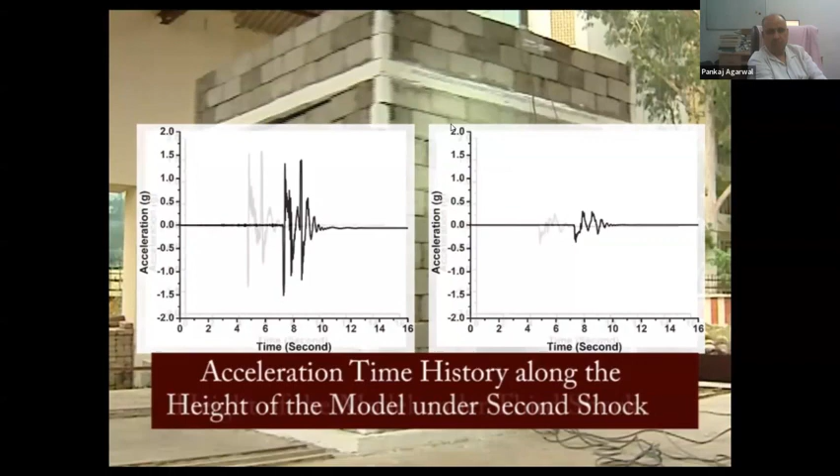In the test results, it is seen that peak acceleration at the roof of model is significantly lower than the base of model without any distress or damage in the model. It underlines the complete energy dissipation through viscoelastic links without damaging the blocks.

The elastic plastic behavior of viscoelastic links reveals that the model regains its original position after completely dissipating the energy imparted during the shock test.

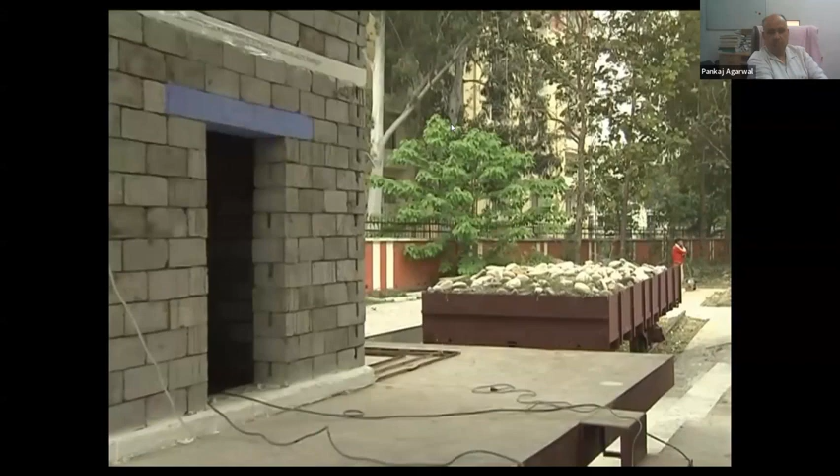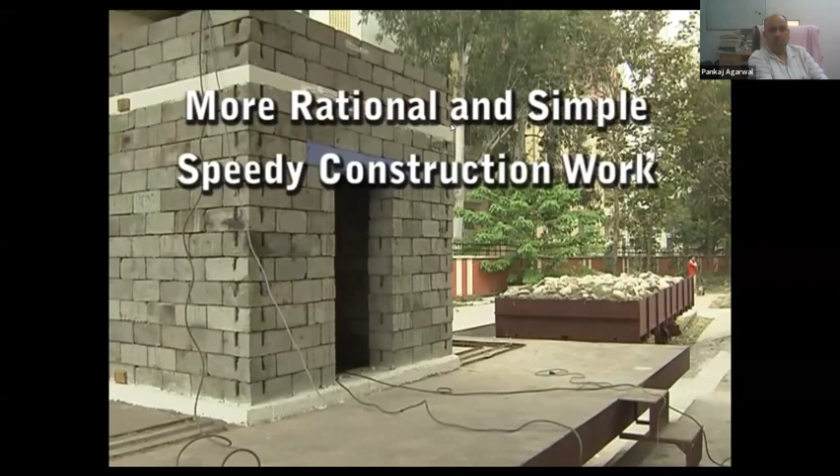Besides better earthquake resistance capacity, there are many advantages of interlinked block masonry system over the conventional masonry system. It is more rational and simple. It ensures speedy construction work. It has high energy dissipation capacity, clean construction at the site, and lightweight blocks or blocks with fly ash may also be used in the construction.

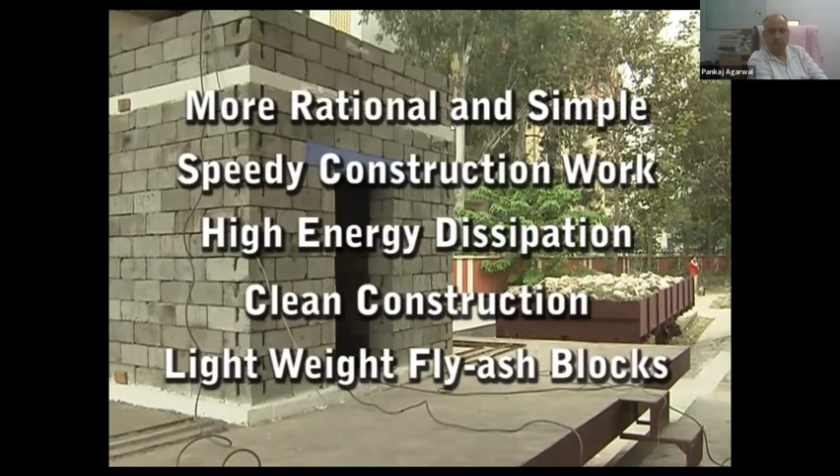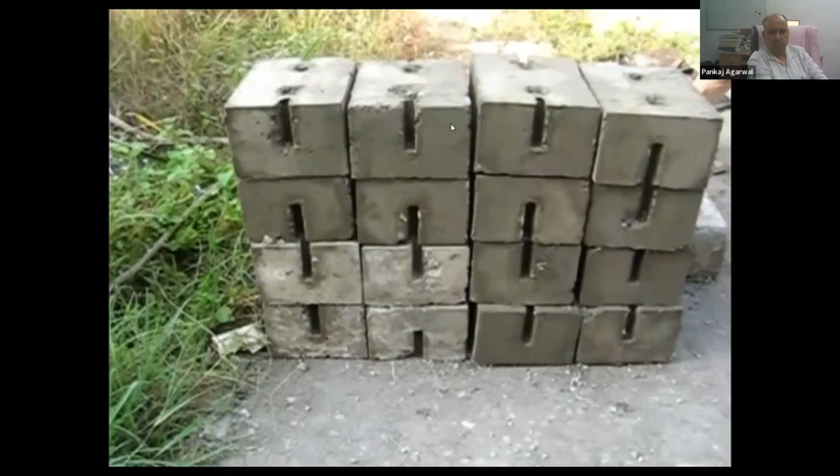So, what do we expect from the industry? Industry intervention is required so that well-slotted concrete blocks and viscoelastic links can be readily available in the market, and to spread awareness about the developed technology.

Okay. Yes, sir. Thank you so much, sir, for the detailed explanation. Is my sound clear? Yes, sir, your sound is clear.